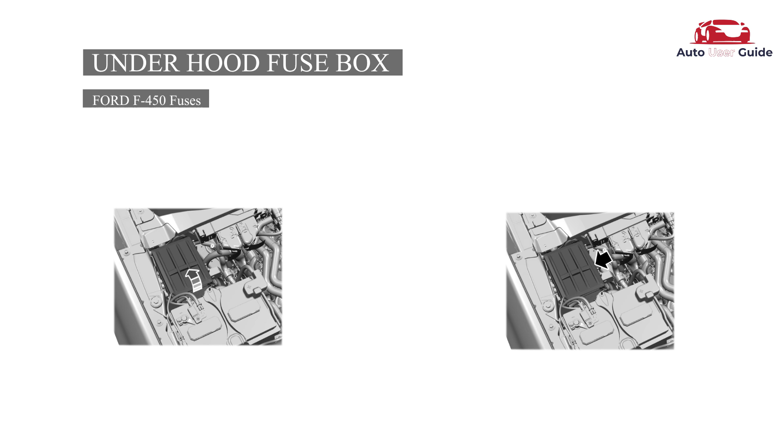Let's discuss the fuses of the Ford F-450. Under-hood fuse box: accessing the under-hood fuse box, locating the under-hood fuse box, and identifying the fuses in the under-hood fuse box.

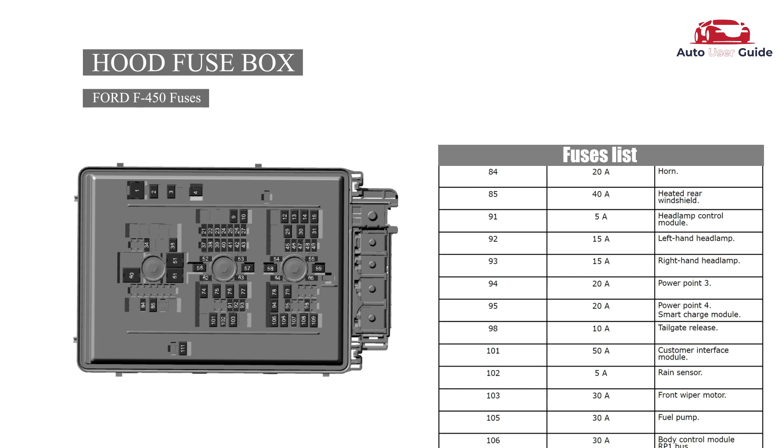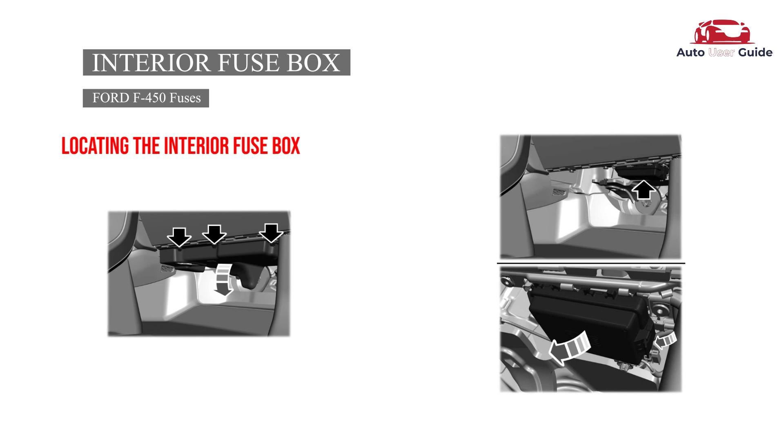Interior fuse box: locating the interior fuse box, accessing the interior fuse box, and identifying the fuses in the interior fuse box.

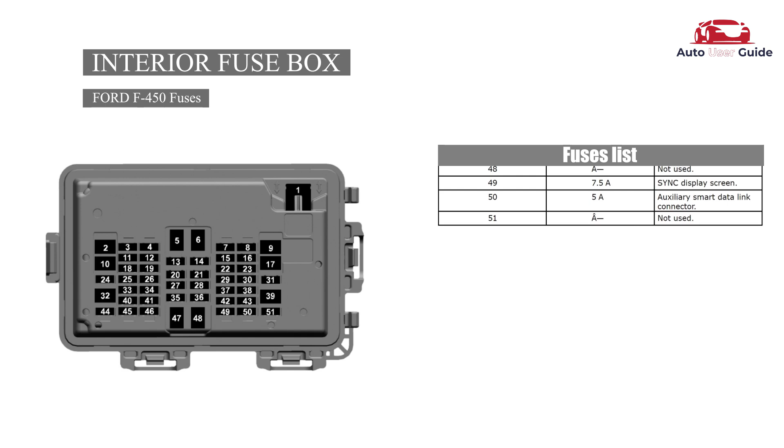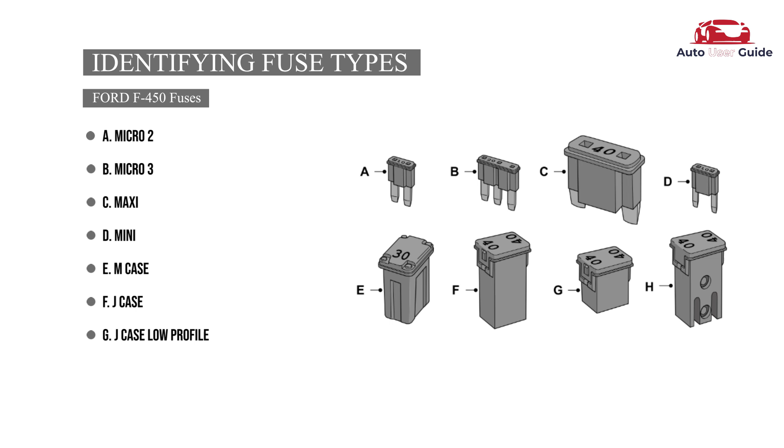Identifying fuse types: A. Micro 2. B. Micro 3. C. Maxi. D. Mini. E. M case. F. J case. G. J case low profile. H. Slotted M case.

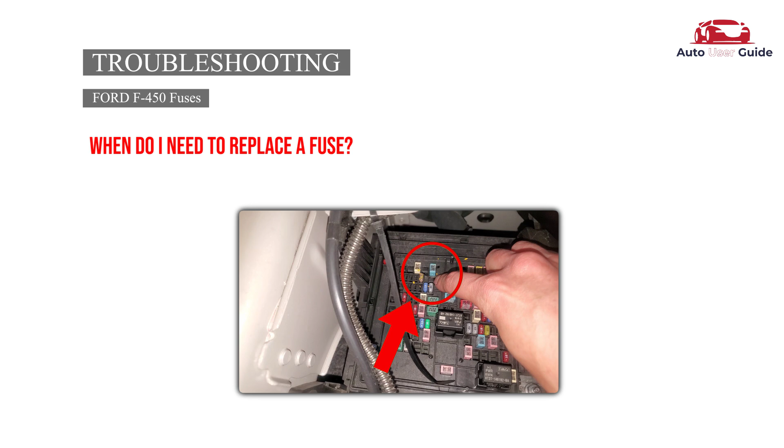Troubleshooting. When do I need to check a fuse? If electrical components in the vehicle are not working. When do I need to replace a fuse? If a fuse has blown. How do I identify a blown fuse? You can identify a blown fuse by a broken wire within the fuse.

Instructions: Do not work on a hot engine. Make sure that nothing gets caught in moving parts. Do not work on a vehicle with the engine running in an enclosed space, unless you are sure you have enough ventilation. Keep all open flames and other burning material, such as cigarettes, away from the battery and all fuel-related parts. Set the parking brake, shift the transmission to park (P), and block the wheels.